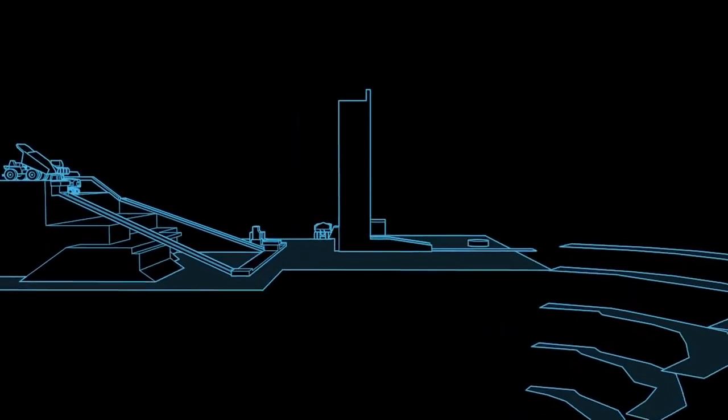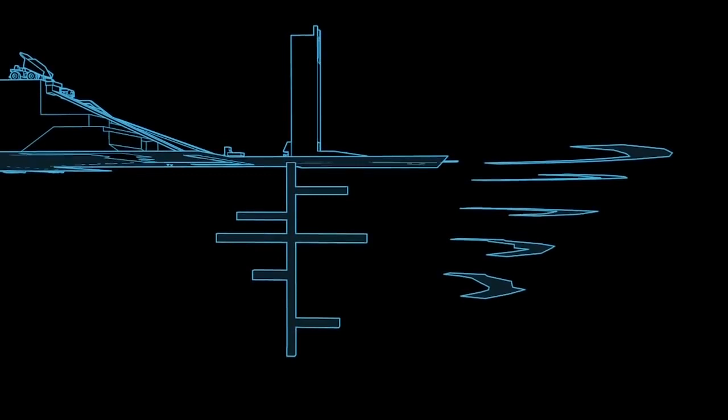Local mining companies have become multinational giants, and mine sites are normally very remote, often with harsh climatic conditions. It's difficult to recruit and retain competent staff to run mining operations in remote places like deserts or mountains. Another challenge is decreasing ore grades. Mines are digging deeper and deeper to find ore bodies. As costs go up, so must productivity if mining companies are to stay profitable.

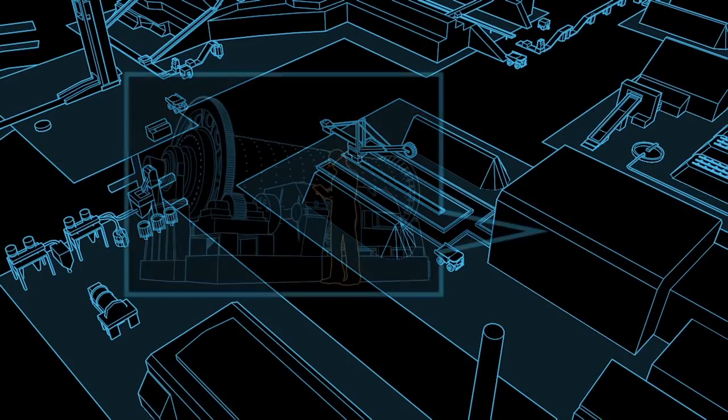Workforce safety is the most important challenge. In spite of efforts being made, accidents still occur, resulting in tougher regulations from the authorities. Workers' safety must be improved, especially in underground production areas, and people working close to heavy machines are also exposed to risks. How can we minimize accidents to ensure a safe production environment?

Another challenge is rising energy costs. Energy efficiency and the tracking of energy consumption have always been areas of concern for the mining industry. The key for improving energy efficiency is a tight integration between the process and power areas of the plant. But this is not always the case.

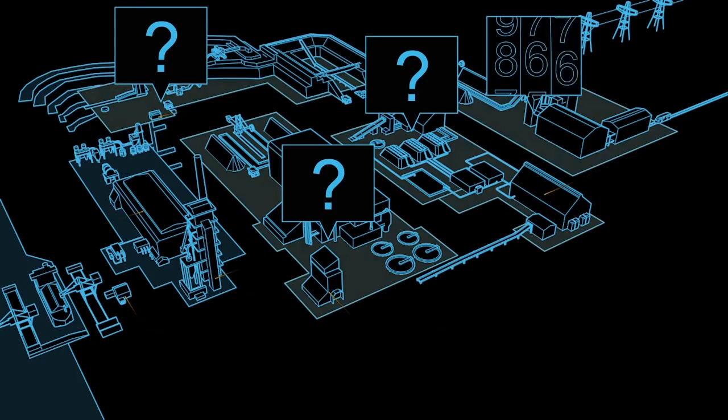The last challenge is typical in many industries. On a site, there's a large number of independent equipment and systems. Each has its own information and interfaces. Operators and control room staff look at different screens and have only separate pieces of information at hand, no overview. We call this islands of automation. This lack of unity and integration goes all the way into the control room, making it difficult to decide in a timely manner.

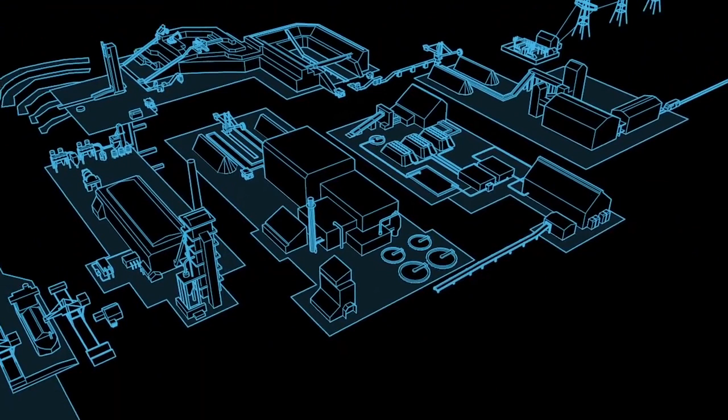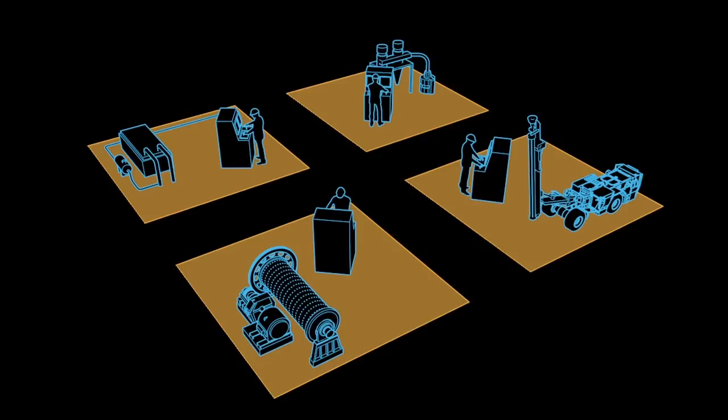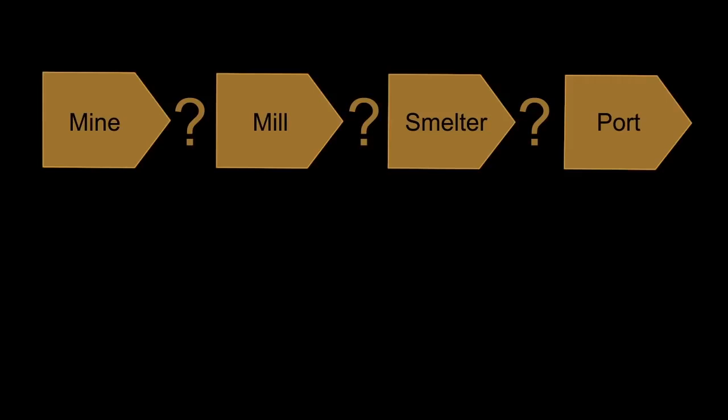Let's take a look at a complete mine with a processing operation. It has 4 process areas where operators run their own machines. Not much communication or collaboration between them. No integration of equipment or systems either. Optimizing the complete value chain becomes a tough challenge. The key is having a full unified view of the production, from raw material to processing, stockpile, and delivery. An integrated solution helps close gaps in the value chain. For example, with good communication, the blasting and crushing in the mine can be optimized together with the grinding process in the concentrator as a whole.

To summarize, the main challenges are safety issues, lower ore grades, rising energy costs, mines in remote locations, islands of automation and gaps in the value chain. Now to the solution. ABB strongly believes that the future of mining lies in bringing equipment, systems, and people together. And the answer is automation.

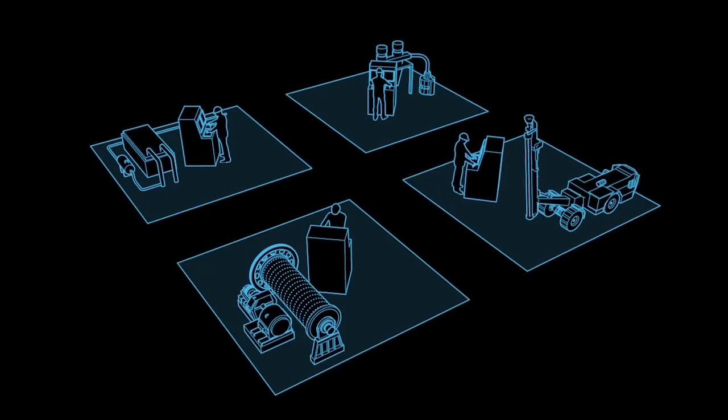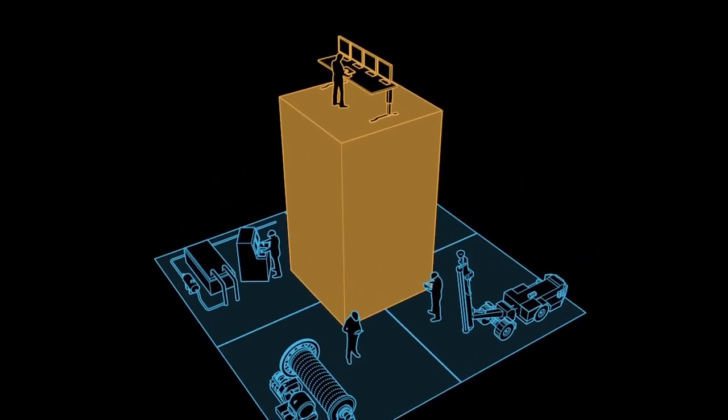Extended automation. This mine site has 4 separate areas, run by local specialized operators. It's costly and less efficient. We want to bring them together, talk the same language and be integrated into one system where all information is available. Local control rooms may still exist, but the trend is towards centralized operations. With modern control room designs, people with different roles can work together in the same environment. Barriers are torn down, control rooms are consolidated, and experts can collaborate in one place.

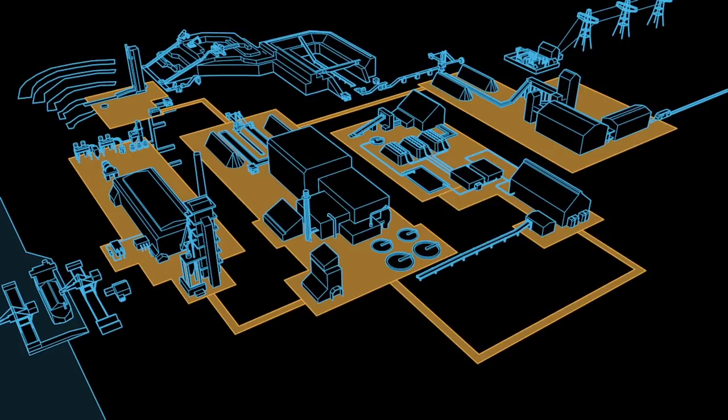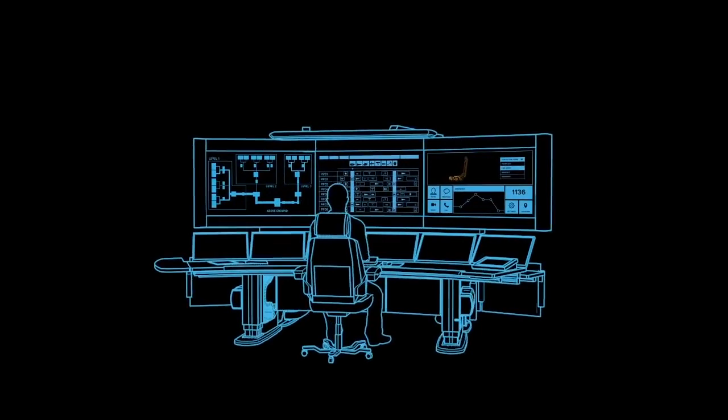Extended automation closes gaps in the value chain and creates a safe, reliable, and predictable production process. It also gives better visibility, from mine to concentrator, smelter, and stockyard. The result is an optimized operation from mine to port. The beauty of System 800xA is that all information is available to all users, locally, centrally, as well as for mobile operators with iPads or smartphones. The Extended Operator Workplace from ABB is a modern cockpit for mining operations.

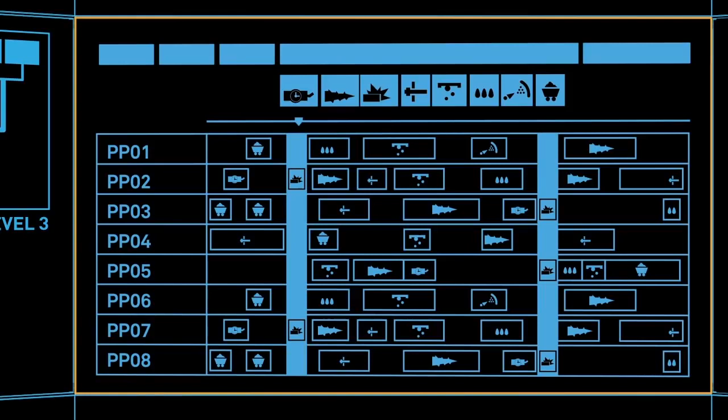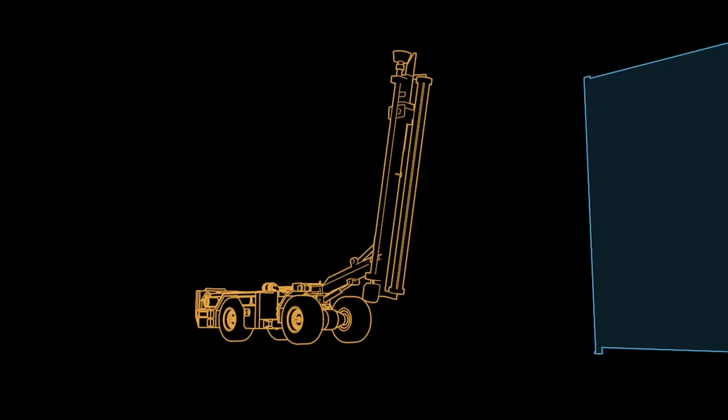With 800xA, everything is integrated. Traditional process control systems, such as PLCs, DCS, and safety systems and electrical equipment such as drives and motors, as well as production planning, maintenance, asset management and documentation systems. 800xA can integrate different users, live video, voice and public address systems, web information, you name it. All information is presented in a uniform way, tied to physical assets. It can even include unmanned equipment, helping reduce the number of people working in dangerous areas of the mine. Bringing equipment, systems and people together for a reliable, safe and predictable operation. That's extended automation in a nutshell.

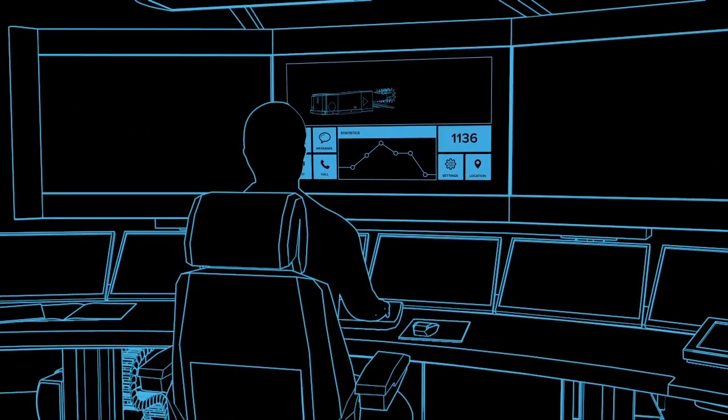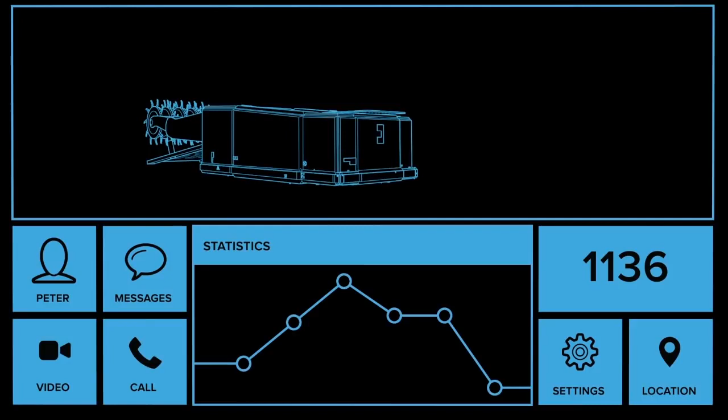Here are some practical examples. Let's start with asset management, a very important matter. There's a piece of machinery and the operator has just been alerted by a predictive maintenance alarm that it will be needing repair soon. The operator can access the maintenance system and see all upcoming work orders. It's easy to add new work orders. He contacts the field engineer who views the same information on his mobile device. Together, they decide on optimal maintenance action.

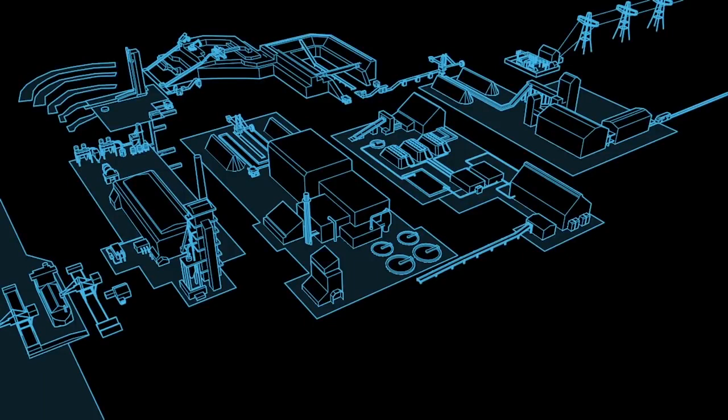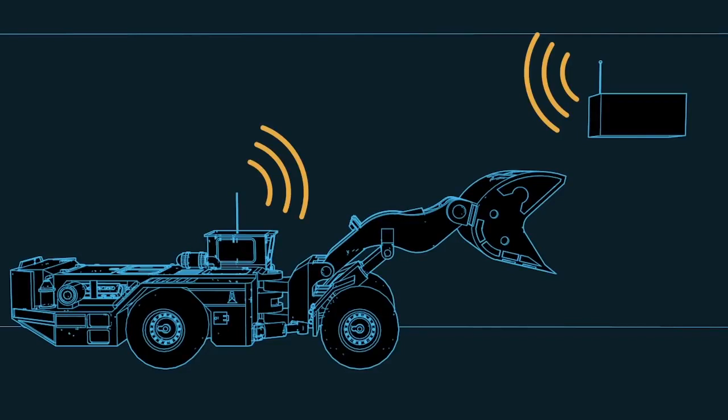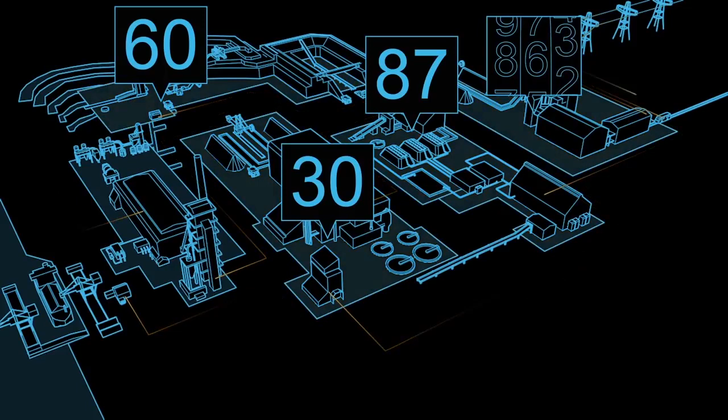Here's an example of how to control rising energy costs. In some mines, ventilation accounts for almost 50% of energy consumption. Mine vehicles emit diesel exhausts that have to be ventilated away. The automation system knows where each vehicle is, and all vehicle data, including emission levels, is communicated to the system. The ventilation is continuously optimized for actual need, and the airflow can be adjusted at any time. Minimizing energy consumption while preserving air quality means great savings. With the integration of process and power automation in System 800xA, energy usage can be measured in real time. It enables operators to detect energy thieves in any area of the plant.

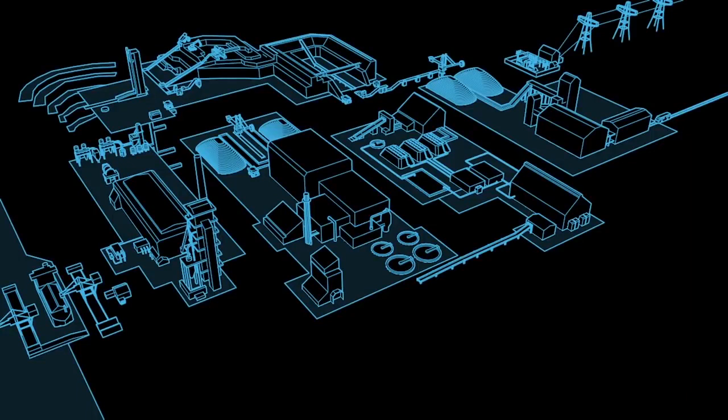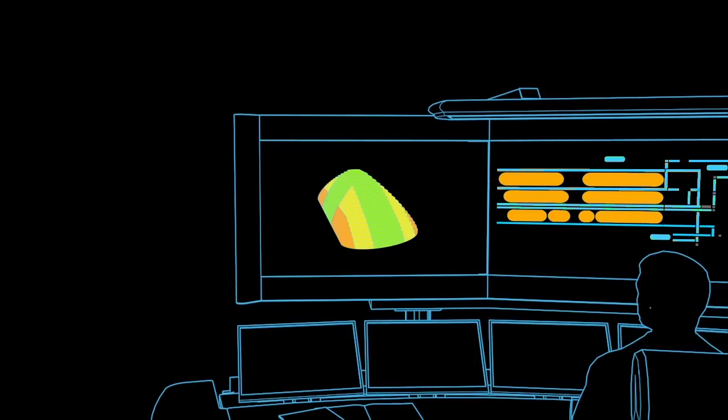Need another example? What about increasing the processing plant performance in a consistent and reliable manner? In the processing plant, impurities are eliminated from the ore before smelting. The plant needs to react quickly to ore property changes. With ABB technology, this becomes possible. It tracks material movements and properties all the way from the mine to the processing plant. Ore properties are logged and represented graphically, eliminating guesswork. The information is available for other advanced applications, as well as to support operators' actions.

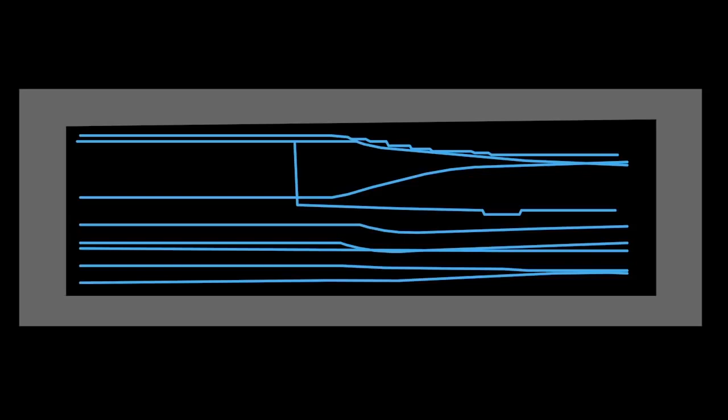Material movements are automatically synchronized with inventory management systems that look after the logistics and the supply chain. Finally, ore information is used by process optimization controllers. They use forecasts of the ore properties to make predictive adjustments to the grinding and flotation circuit. The result is higher equipment utilization, increased production, and lower energy consumption.

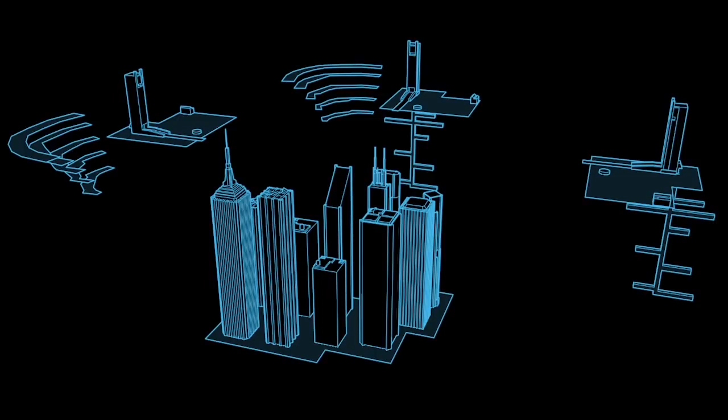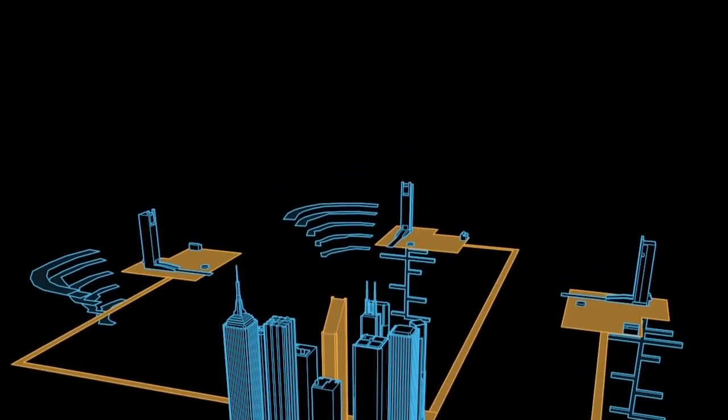Mining companies have become multinational giants, with mines scattered all around the world. With System 800xA, all information from local mines is also available and consolidated into corporate headquarters. This facilitates collaboration across mines. Production planning, resource planning, specialist support, inventories, spare parts, etc. can be optimized. By harnessing the full potential of ABB's extended automation, mining companies can raise their productivity and safety and achieve a more efficient and profitable mining operation.